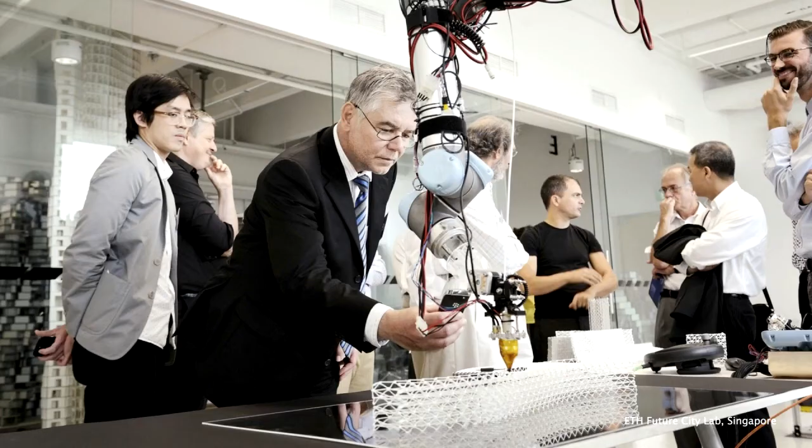This is an interesting notion, in particular if you think that we ourselves at ETH Zurich are entertaining laboratories in Singapore, also in the tropics, looking at higher-end developments of what is possible in an environment like Singapore. You see studies of possible skyscrapers, production methods—this is robotic building, Gramazio Kohler. We're trying to figure out how those future cities can look like, in small scales, in measurable ways.

I would suggest you think about light as life—it's your lifetime. If you sit in a dark room, your lifetime is actually shortened. We already heard a number of examples: if there's no light to read a book, to learn, to continue your work, your lifetime is literally shortened by those hours.

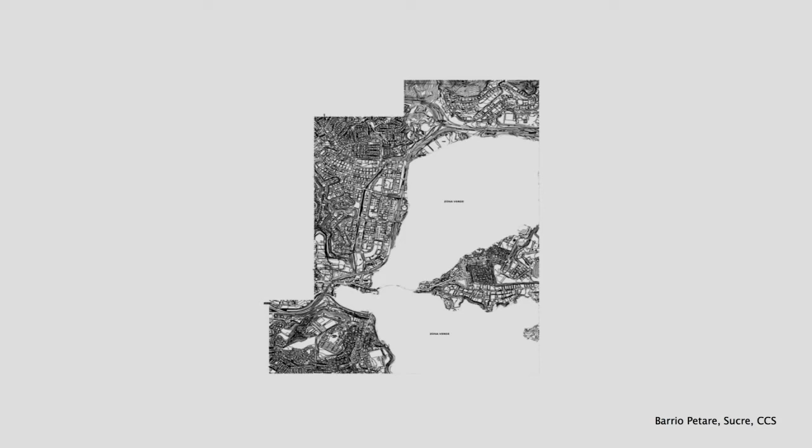Let's say until 10 years ago, this is how it really looked. There were about 200,000 people living alone in the northern section of Petare that were simply not accounted for, and for the same reasons, they had no accessibility to police stations, post offices, or any other public services. They were left on their own, if you want, but they learned to survive.

Just like in Caracas, here from '49 switching to '66 and into the recent past, those areas are actually expanding on top of territories that were not slums. Talking about light and an industry, it's not only about new buildings and new houses and new cities. Cities are actually a permanent process. There is no finished city.

Maybe a ghost town is finished, but finished forever. All other cities are permanently transforming, and you will see walking through your favorite area of your city, your hometown, maybe the inner city of Bregenz, the old city, that there have been generations of renewal, also infrastructural renewal in the same buildings. This is again not a static result, but a process that we have to learn to deal with.

So let's go back into Caracas. Here we are, just as the sun is going up. Many of the challenges I'm mentioning here have urbanized—namely urban terror, guerrillas coming into cities, natural catastrophes coming into cities. When I was a kid, we still saw pictures of Ethiopia with skinny cows standing in the countryside. That's all urban now. A new generation has actually grown up in extreme poverty in cities.

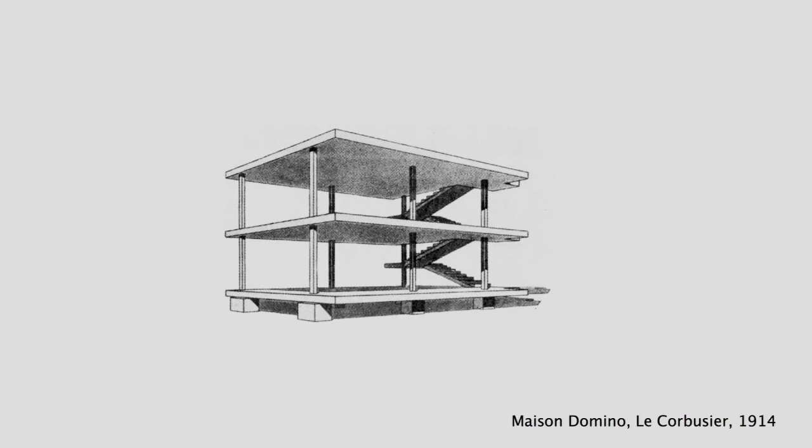But first and foremost, what is this environment actually about? I showed you already the people, and I showed you the prototype, the original housing prototype of Corbusier—it actually celebrated its 100th birthday. A sketch made on a kitchen table, about that size, on a piece of transparent paper. It's the seed of the modern movement—a house without walls. It was actually built for Belgian villages shelled by German grenades, so people could fill the walls with the rubble of the villages and create a new life for themselves and their families.

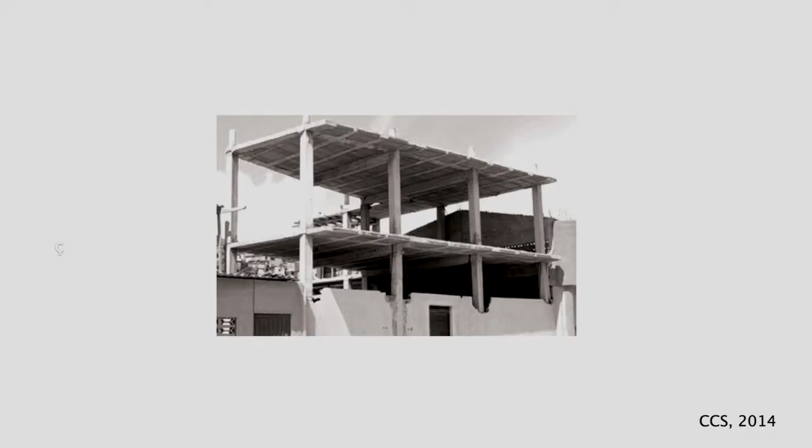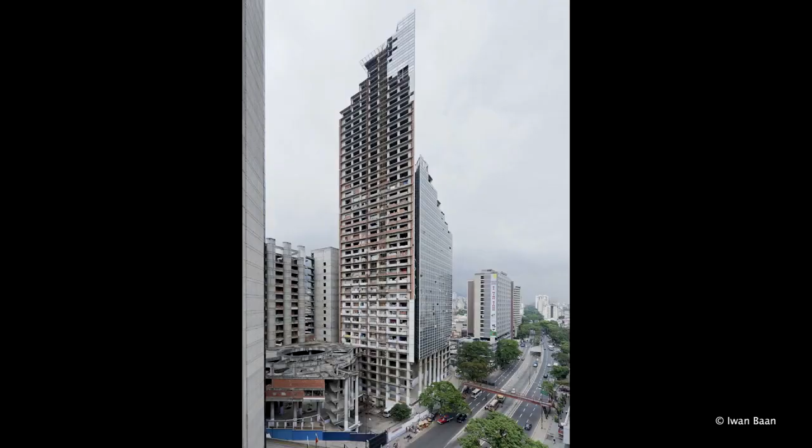There's modernism crashing and overlapping together with those informal, urban vernacular settlements, and there are towers like the Torre David. And before I go into our urban toolbox, I like to show you this study on Torre David that we have entertained over a couple of years.

Despite the fact that you might have read that this torre is in the meantime emptied, people still live there because they were sent to houses outside of the city and they just came back a week later. Interesting enough, this is actually the biggest squat in the world, as we like to call it, a giant standing in the middle of the city, a result of mismanagement, if you want, but also for us an interesting laboratory.

Why? Because everybody would tell you that having such a tower needs equipment, technical equipment. Again, science and technology have provided us with that, right? Otis invented the elevator, hence we can build skyscrapers. Skyscrapers have facades, air conditioning, electrical systems, black water, white water, pumps, etc., filled with infrastructure.

I can guarantee you this building has very little or none of that. And if it has systems, they actually have been replaced by human bodies, literally. There's no elevator in this tower, but there are more than 7,000 people living inside. I'd like to invite you to see and understand a little bit what's going on inside the tower.

So, 45 floors of this tower, half of it filled with people, and we were very interested about the ingenuity, about the way in which people actually find their way around it. How are people actually moving around it? How are the stocks and flows? How do people come from one floor to the other? Do they have services? It is actually a model which is an anti-modern model.

It is a structure, a skeleton, just like the domino house, but it has been filled by content. It is not a formal exercise, it is actually a content exercise, because people who had no idea what this tower was planned for—a hotel, a bank headquarters, a couple of other programs—they have moved into this building and created their own livelihood, sometimes quite sophisticated, sometimes very improvised, but always fit to their budget and fit to their needs.

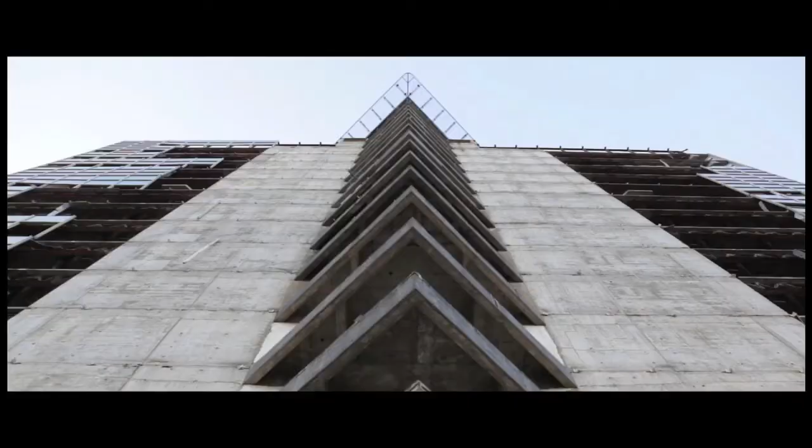We looked inside it where stores have been founded. This is a rooftop gym, etc. All of that exists in the tower, and even if that looks like an exercise, a window into a world far away, we are doing the same thing in our cities every day. We're transforming them, we're reprogramming them, we're doing actually something different with them than they were planned for. Just looking at it compressed into a very short lifespan, it suddenly becomes an amazing, interesting, exhilarating exercise.

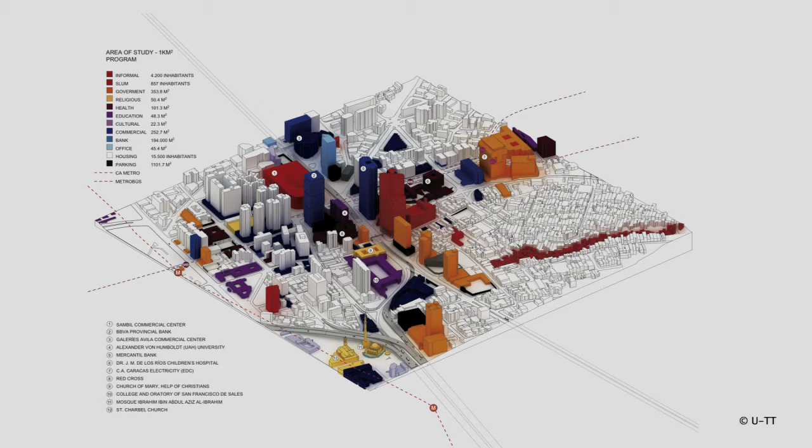There are actually services—services on the street, but not services in the building. And you might think, how would you even think about moving into such a building if you have to walk up 20, 40, 30 floors? I can guarantee you that it's not really a problem, because a house on the side of a hill confronts you with a similar challenge—you also have to walk up 20, 30, 40 floors.

So this sort of squat is quite comfortable. And as you can see, the man with the cast on his foot is smiling because he knows in a few minutes there will be 3 or 4 guys showing up who carry him down to the sidewalk.

I think the capacity that social networks and social structures can literally replace mechanical structures is an exercise we should learn from. A store built on the 10th floor has a hole that connects to the neighboring parking structures, where people can drive up with motorbikes and deliver goods into the tower.

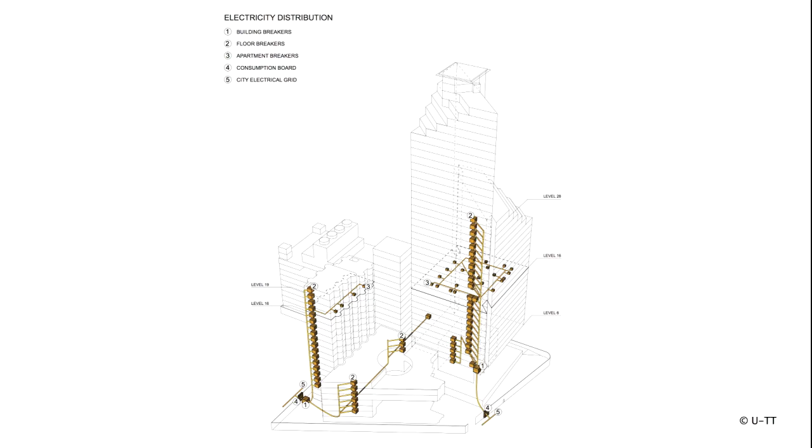Again, an electricity distribution, makeshift. If I say makeshift, all the engineers in this room might get a heart attack seeing how that looks in reality. But as improvised as it looks, it works. It gives you opportunities to live in the middle of the city with a very little budget, to have affordable housing, something architects in the last 50 years have hardly achieved in Europe. That is exactly the reason why you have barrios and slums in cities, because there's no affordable housing. There's a whole industry out there, but nobody has managed to produce that product.

The same problem is replicated in Asia, in China, right now as we speak, by the millions, in this process of urbanizing 250 million people. There will be a lot of people who will build those cities, but they will not find a place in those cities. And we have a few ideas what to do about it.

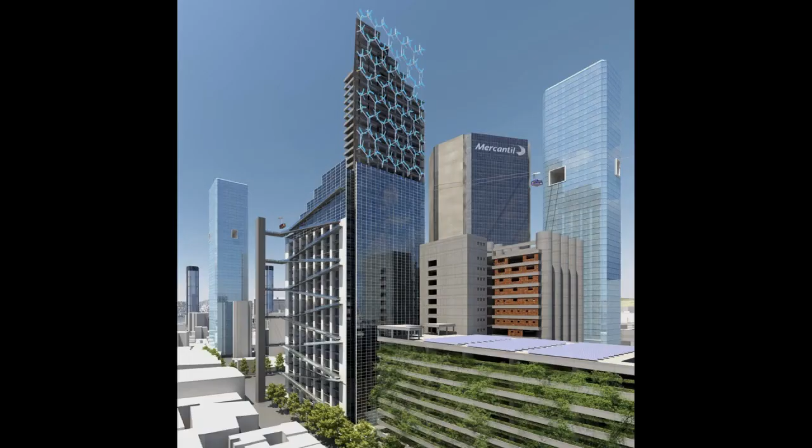This research-based project resulted in an exhibition at AEDES in Berlin, a place which has long been supported by Zumtobel, which also shows a non-direct interest not only in the arts but also in architecture and what is going on in the world, and has led us to make an exhibition which was also shown there.

I think I'm at half time now, so I'd like to show you a few applications, a few projects, because we're not only a think tank, we're also a do tank. We have a few ideas of what you could do in cities, and I've picked three, some a little older, others newer, that I'd like to share with you.

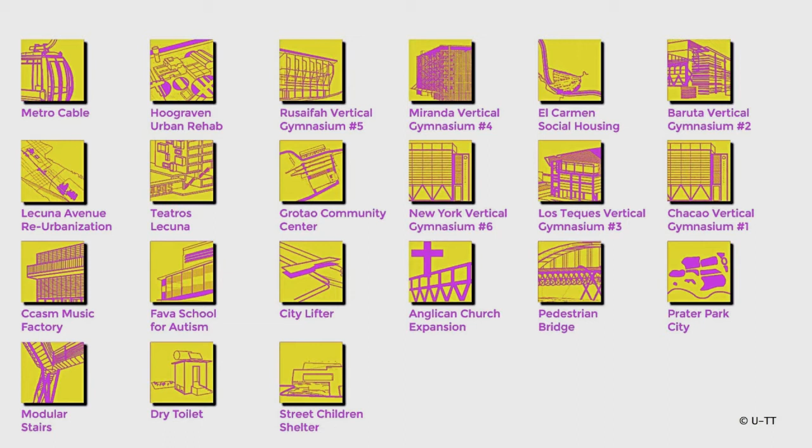So here's the metro cable project, which I always like to show here in Bregenz, because there's another company next door. It shows the productivity of the people here in Vorarlberg. If you go skiing, you probably used one of those Doppelmayr metro cables.

Why is that? I already mentioned the people in Torre David. They have no problem walking upstairs because they walk upstairs in those barrios and favelas too. This is how it looks, and when it rains, it looks more or less like this. So you can imagine what it means for those people to have access to electricity, to transportation, to drinking water, to all of that.

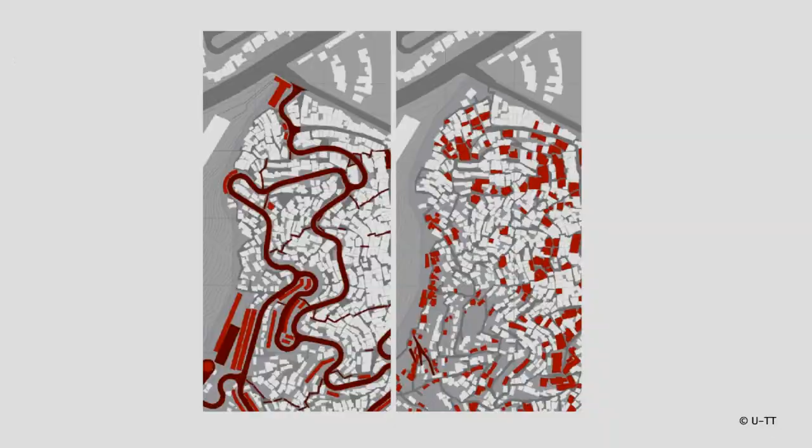Our usual reaction to the problem, you know the line: for a man with a hammer in his hand, every problem looks like a nail. I'd say to most people, and most transportation engineers, the solution would be a road. You see here on the left, one drawing of this particular project to bring accessibility to San Agustin, to this mountain. But when people saw this plan, look at the lady on the bottom right; she realized her house is gone because the road goes on top of the house. So you can imagine people were not that happy. 33% of the people would lose their houses in the process of constructing the road.

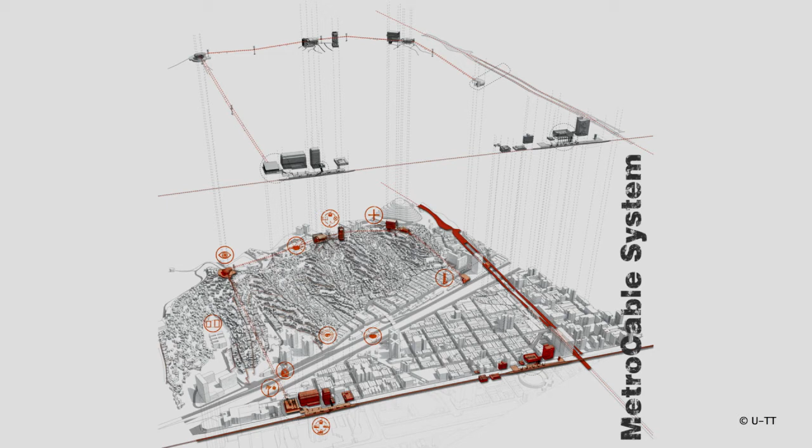So this was the moment for us to propose this sort of metro cable system, which is now a household name, first built in Medellin, then Caracas, and in the meantime in many other places in Bolivia and Brazil, as feeder lines for a subway that you see here on the bottom. So it's not only a merry-go-round, it's connected to a transport system.

We believe this is exactly the spirit of engagement, an impact of design - that you do something which is not driven by creating a form, but by creating a content where the people, the physical environment, and whatever you can add to it are actually in a meaningful relationship to each other, and where they really change in a positive way with a high impact the livelihood of people.

You see here still the stair going up, illuminated, but that is now rather used for going down than going up, which you can imagine is a big difference, even to bring cargo. If you slide it down, rather than carrying it up, it has turned around literally the life for about 40,000 people living in this neighborhood.

I go to the next project just by showing you a few stills. This station was highly criticized for its fanciness, but I can tell you we only chose the best materials because this is the station with the biggest frequency of customers, and we saw that there's no argument for using inferior materials in a station that has more customers than any other metro station in the city.

So only to that - and I can guarantee you also that driving that cable car is really making fun, and life changes really the life on this mountain.

So, second project: this is the vertical gym. Most people would tell you that it is impossible to provide sports areas in the barrios of Caracas. They're very dense, buildings up to 5 floors high, on steep hills. There's very little area that you could even use for sports.

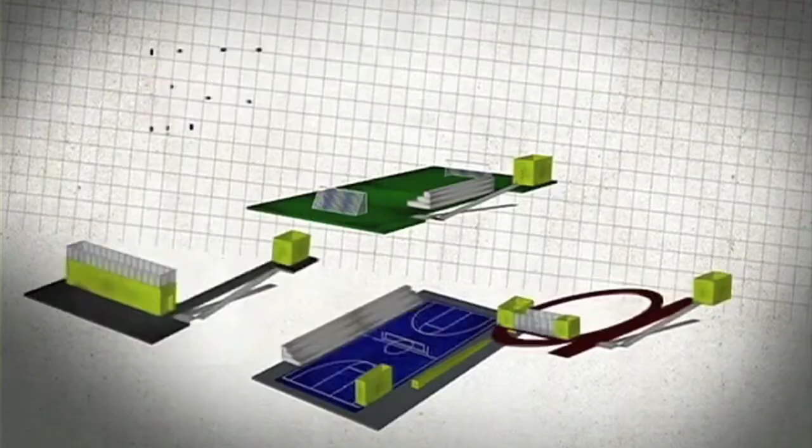So to organize the sports areas vertically, just like the houses grew - first spreading out horizontally and then putting one floor over the other - was at the end our inspiration. We pack 3,800 square meters that allow those 15,000 visitors to have those sports areas available.

15,000 people. It's not really about the aesthetics of a building, but it's about building a social consciousness that we have to build an environment for everyone in the city.

15,000 people every month. I'm sure the Kunsthaus Bregenz would be happy about those numbers, but it's really about the numbers in those cities. And I can tell you that it's also changing your way in looking at architecture.

At this moment, also thanks to the jury - I know there are a lot of the people here - and thanks to Zumtobel, it got the second prize, but we were still very proud to be part of the Zumtobel award last year, 2014.

So this is the gym for people. And you can probably understand that there's a lot more going on than only playing basketball, because those kids actually grow up into gangs because they have no meaningful other pastime than shooting drugs rather than balls.

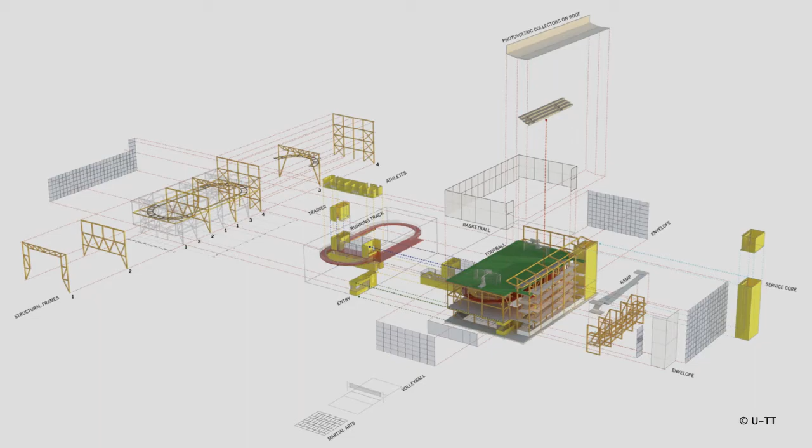The Swiss Olympic gym, as one donation to the mayor of Rio, because believe it or not, Rio is carrying out the World Olympics, but schools have no sports fields. So I guess we will see more people out on the street demonstrating for that.

But there are answers to it, and I think we all, in collaboration with locals, in collaboration with people who really know because they live there - they are actually the experts - we should think harder and better about what the solutions for those situations can be.

It has a lot of disadvantages, but it is a little bit better than the houses that already exist. And this is exactly the spirit that we have taken on. We're not looking anymore for perfect solutions, because there are no perfect solutions for the larger majority of people living in cities. You can assist, you can make things better, and you can create a bigger velocity of learning and adopting solutions, of sharing them and improving your own life, maybe with your own resources.

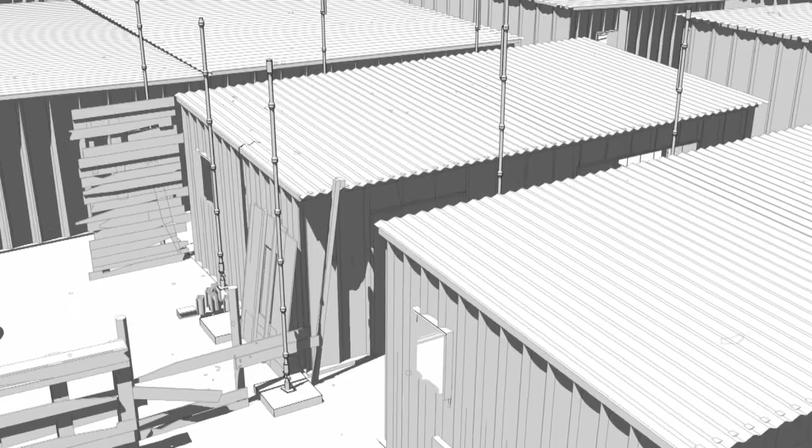And I show you how the house is built. It's built in 24 hours, because people have no interest to be without a house. They have no trust. They've actually waited for 25 years for the house that Nelson Mandela promised every one of them, and they're sitting in those shacks, and they will probably wait another 25 years.

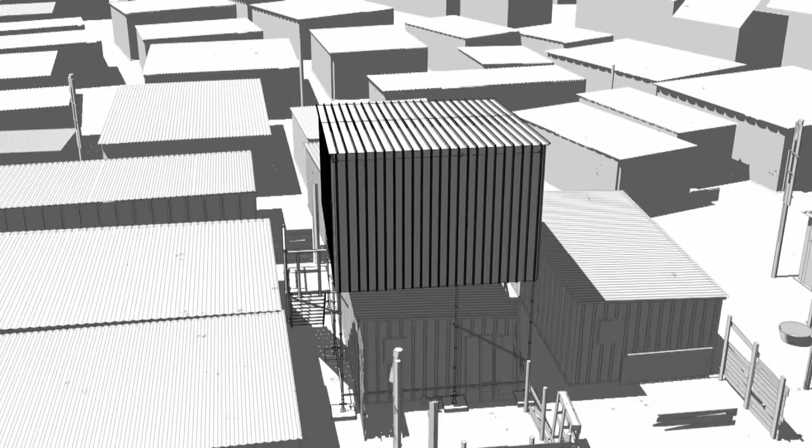So this is actually a perfect opportunity to get your hands dirty, to look at the materials that already exist in South Africa, in the hardware store just around the corner, rather accessible, and how to build yourself, perhaps over time, 1 or 2 of those floors, together with the resources that are available in a community.

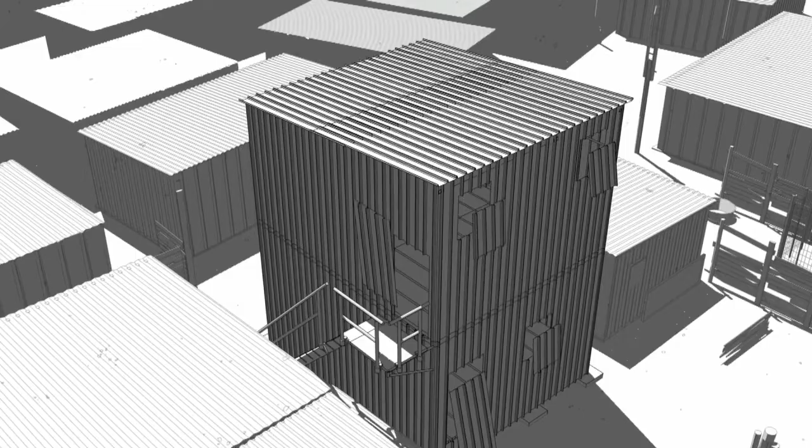This is the BT section, figuring out how smaller houses allow for more space and distance between them, creating public space, but public space that is at the moment without illumination, a big security risk. What they did is actually, the government put the same lamp system like in prisons, 40-meter high lamp masts with very strong light. This is illuminating in the night the neighborhood for security.

We believe, together with Zumtobel, we could do better. This is actually a laboratory for that, to find out how that can work and how we can create in this sort of swapping and finding out who lives where and what sort of quality spaces we can create, together with a sort of a confident building process.

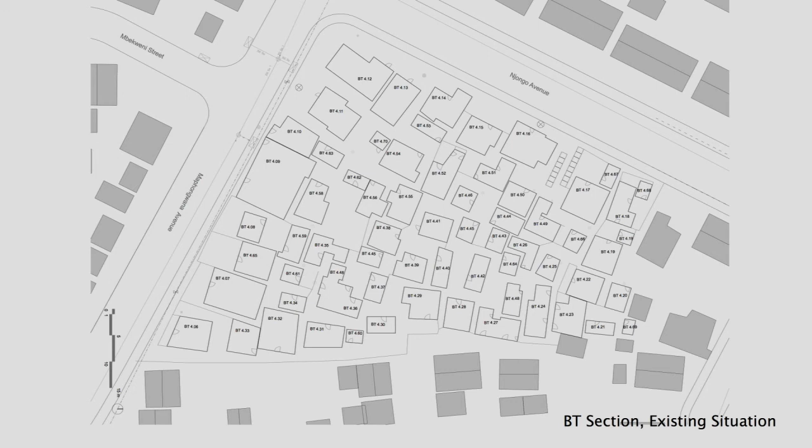So nobody is left for 3 weeks somewhere. The house is built in 24 hours. The furniture is out on the street. The house is built up together with neighbors, and the result, maybe you have the picture in mind from before, is this—

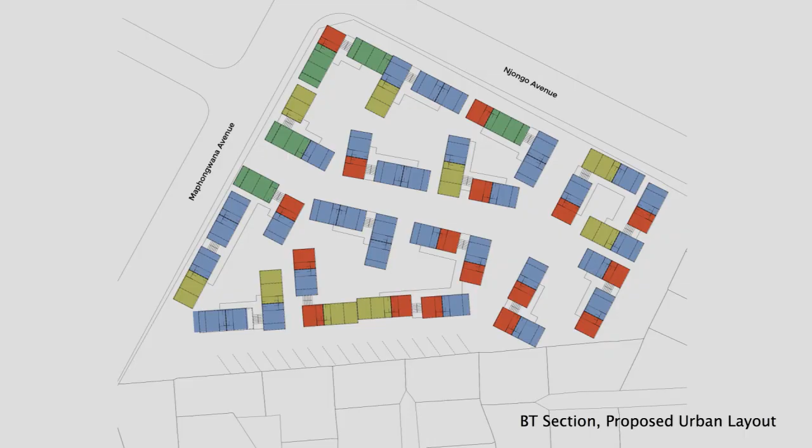an area with neighborhoods, with family clans, with privatized areas that sort of define that space, and with people who suddenly go into the construction industry. So they not only have a new house, they get a new job, and looking at the size of the townships in South Africa, there's a lot to do.